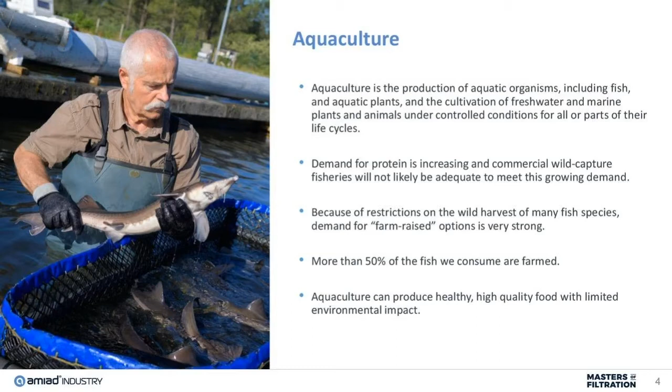I think that we're entering the perfect storm. One, the population of the world is increasing - we're just shy of 8 billion people. The environment to harvest aquaculture is a limited resource. The demand for protein is increasing, both due to population growth and changing diet standards. And the aquaculture market is already established with strong growth projected for the future.

So what are the needs for aquaculture? We at Amiad believe there is a huge unmet need for auto backwashing filtration in this market that we have begun to assist with, and we look forward to partnering more in the future.

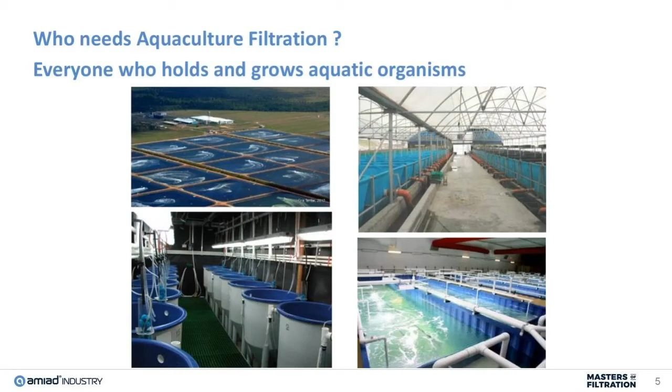For example, filtration may be beneficial in a variety of the application stages. From intake water to grow out systems, we have different technologies to meet the different needs of the plant.

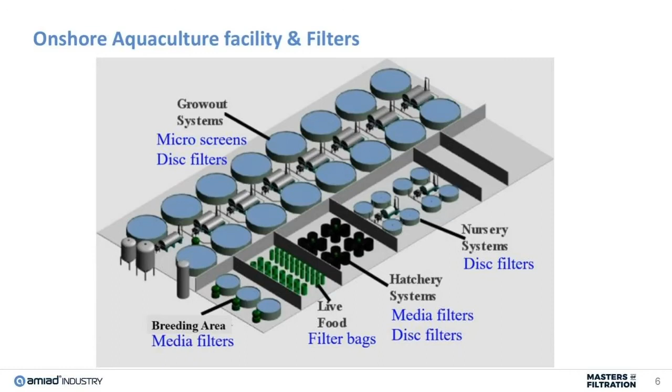Okay, so I think we're on board with why are we talking about aquaculture and why filtration, but why Amiad? Amiad has a wide range of products that are suitable for many different applications and are made of different materials. Amiad has been around since 1962 and provides solutions for our customers in irrigation, municipal, commercial, industrial, and aquaculture industries, among others.

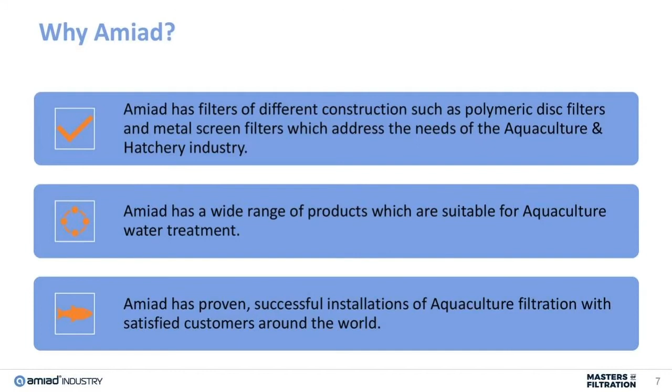Here's a brief overview of the technologies we have, and then we'll talk about them more in depth as we go on. So on the left, we have the Spin Klin disc that utilizes these discs with ridges that provide depth filtration via numerous pinch points that is created when they overlap. Additionally, this technology is known for its violent backwash, so it's great for gross, sticky, organic type material.

Moving into the second picture, the suction scanning screen technology is one of our most mature technologies where Amiad has devoted huge amounts of R&D developing the best screen for optimal performance and ideal suction nozzles for the optimal backwash. Our screens are known for their great performance and small footprint.

The middle picture shows media, we also have that, and we have different types of media depending on the application, and we have a variety of models and sizes to accommodate fine filtration needs.

And then our AMF microfiber technology can be thought of as an auto backwashing cartridge filter. You receive terrific fine filtration quality with the convenience of automation. This is most known for the Title 22 applications in California.

And then lastly, but not least, we have separators, and they're great for removing heavy particles such as sand and grit. Another benefit of separators is there's no moving parts - some might refer to them as a fancy piece of pipe. There's a bit more to it, but in general, you don't have any moving parts, which makes it handy for certain applications.

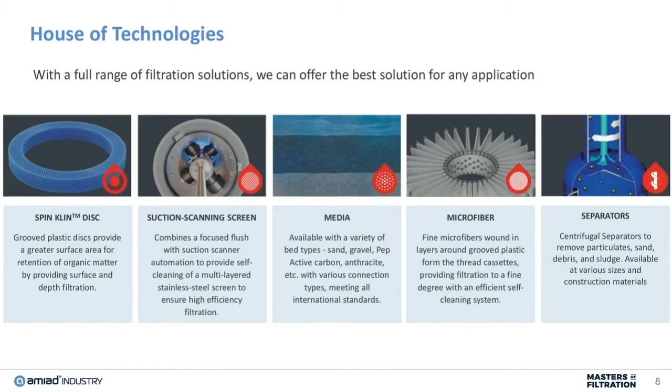So as you can see, Amiad has numerous tools in our toolbox, and we can provide the best fit for your filtration need. We're not trying to force one filter into every single application. We want to have a comprehensive idea of what the application is to see if we have the best filter for that.

And then this is a quick reference of what micron ranges we can look at for each different filter type. So on the top is our screen filters and where they operate, whether we can use the hydraulic version or the electric version. And then the Spin Klin discs, separators, media, and microfiber filters.

And for reference, the human hair is between 40 and 80 micron in diameter. So when we talk about filtration, we're often talking about particles that we can see with the naked eye. And then it gets more difficult as you get below 40 micron.

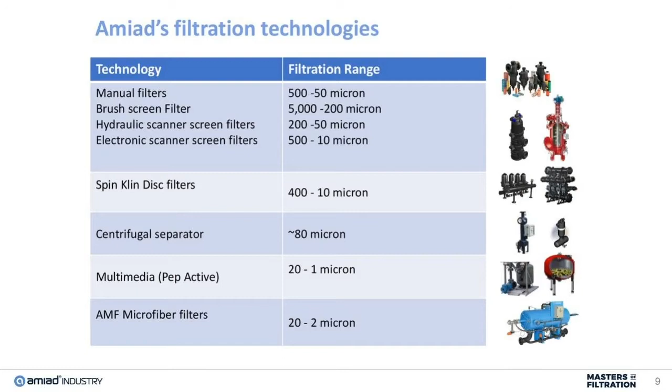Okay, jumping into screen filters. So the picture on the left is a photo of the outside of a screen. We have these cylindrical screens where particles are collected on the inside.

Then when there is a differential pressure of 7 psi between the outlet and the inlet, the unit automatically goes into backwash. During the backwash, you still have most of your forward flow, with some of it being used for the flush. After the 20 seconds of backwash, the filter comes back online with a completely clean screen.

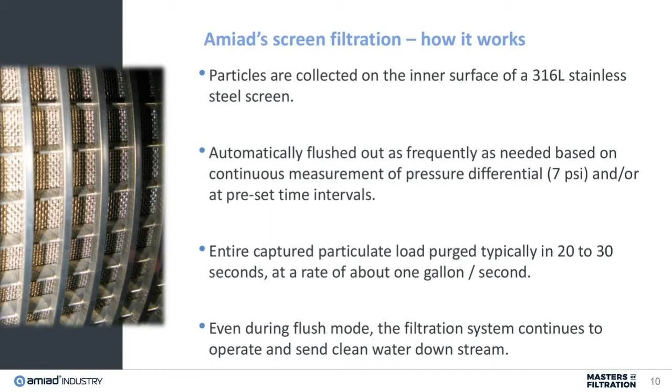One thing to note here is that not all screens are made equal. I encourage you to work with your client on what performance they are expecting out of their screen. Amiad provides weave wire screens that have an 85% plus rejection rate of the rated micron size particle. So if we say that the screen is 50 micron, it'll remove the 50 micron particles at a rejection rate of 85% at least, along with all the larger particles.

So there is not a filter governing agency or a big brother going around holding all the filter manufacturers to a standard. So someone else's 20 micron screen might only have a 40% rejection rate, and then Amiad's is 85% rejection rate. And so, this is just a reminder to be aware of what you're buying and to phrase it in ways of what performance are you expecting.

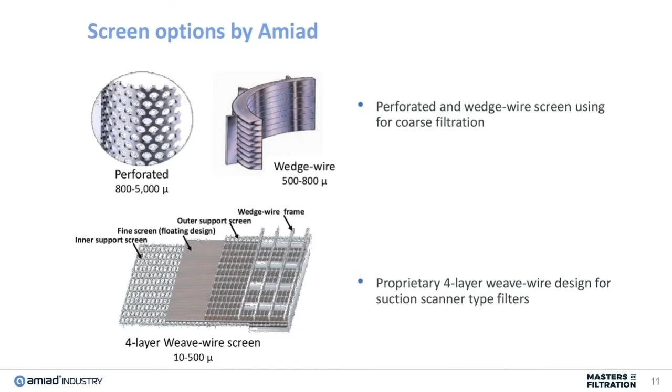Another feature that Amiad has is our spring-loaded nozzles. These nozzles do a fantastic job in cleaning fine screens because the nozzles get as close to the screen via the spring action. This allows for more efficient cleaning and less backwash water used.

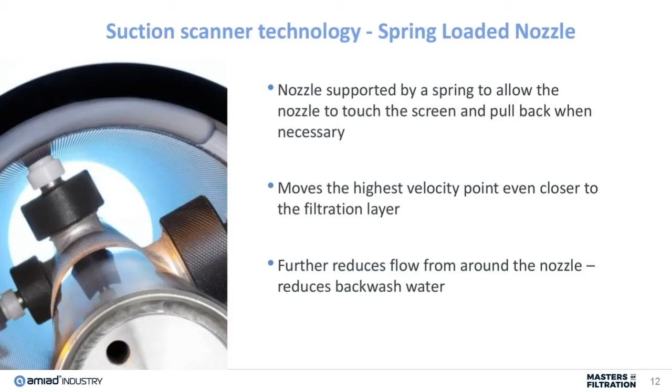So what do our models look like? We have a variety of sizes and configurations to meet the needs of your plant. We have both electric and hydraulic driven filters, carbon steel, stainless steel, rubber lined, polymeric, the works. When it comes to the models, we have a variety to meet this specific application.

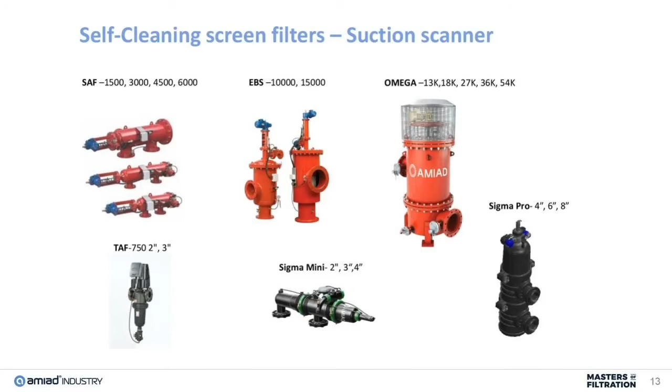Okay, let's talk examples, because sometimes I think it's easier to go through the examples together to see how they work. So here we have a manual screen. I know we've been talking about the automatic, but sometimes manual filters are just what the job requires. And here the customer just wanted to filter the big stuff before it went into the fish hatchery. So this is at 800 micron. And for reference, that's the same size as the 0.8 millimeter lead that we used to get for mechanical pencils. So, we're saying it's coarse filtration at 800 micron, but still it's quite small.

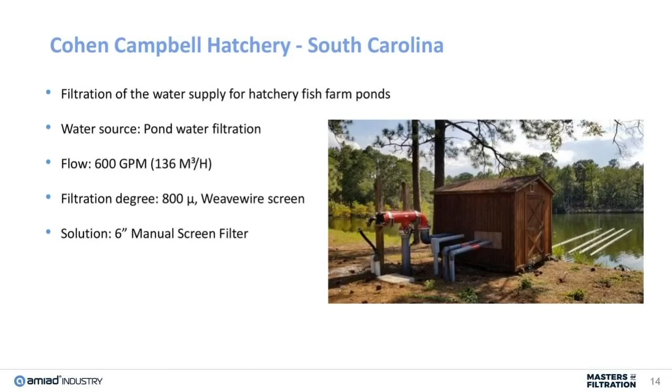Here we have our ABF brush filter, and this is with our partner Timex. The design here is similar to the screen filters, and it's just different in the fact that instead of suction nozzles, there are arms with brushes in this filter. And here we have our 1000 micron for incoming water, and the incoming water is river water, so you have a mix of both organics, your leaves, twigs, frogs, and inorganics such as sands and gravel. This is a great first step to removing the big stuff.

And on a side note, the ABF we've used in mining as well. So you can imagine it can take a really high TSS, total suspended solids, load and do exceptionally on that.

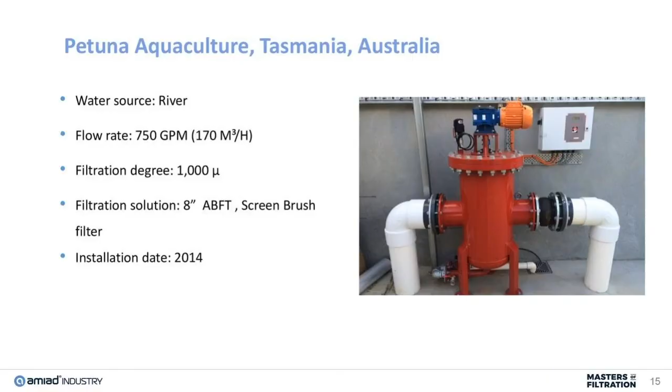Okay, so we have some good intake examples, and this is a very neat look inside the hatchery in Turkey. We have a few levels of filtration here to discuss. Stage 1, the rotary drum filter. Stage 2, a 100 micron drum filter. Stage 3, the SAF, which is the suction nozzle screen at 25 micron. And stage 4, 1 micron bag filters.

So you might ask, this seems like quite a few stages. Why would you not just go straight to the 1 micron bag if that's what is required? If we were to take the raw water right to the 1 micron bag filters, it would plug instantly, and the operation and maintenance cost would be astronomical.

So we found that stages are very helpful when the particle size distribution is wide. So you might have particles at 1 micron, at 5 micron, at 50, at 200. So when we target those specifically, we do quite well with stages. So we can be picky about which filter is where and what size it's at to address those size particles. Overall, this will decrease the overall backwash and wear and tear on the filters.

And then furthermore, it allows for smaller stages. Because if you can imagine, say we skipped the drum filters, it might require 10 SAF 25 micron filters to handle that high load rather than just the one SAF filter.

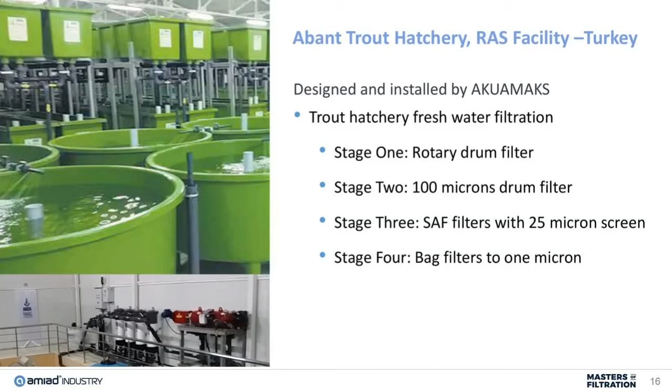Here's an example of utilizing our EBS technology at 25 micron in Vermont. We've found that anywhere between 20 micron and 40 micron technologies work very well for zebra mussel control. And we have a whole other webinar on that, so if that's up your alley and you have a problem with zebra mussels, let us know and we'll send that along as well.

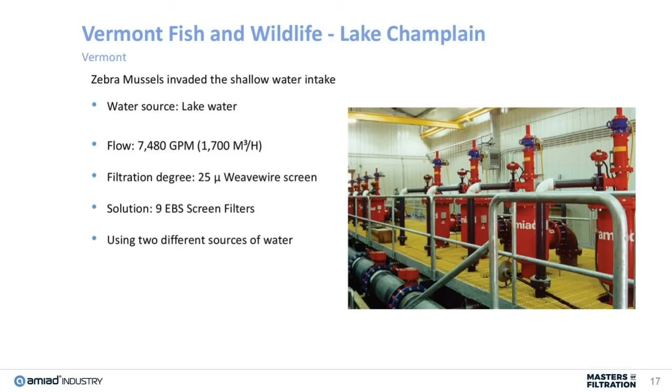Okay, so those were some neat screen applications. I'm going to jump right into our spin clean disc filters. Now, the spin clean disc filters are very neat because they are polymeric, modular, and they have a violent backwash. How these work is you have these rings, and the rings have grooves in them. When you overlap them, you make dozens of pinch points that trap the particles.

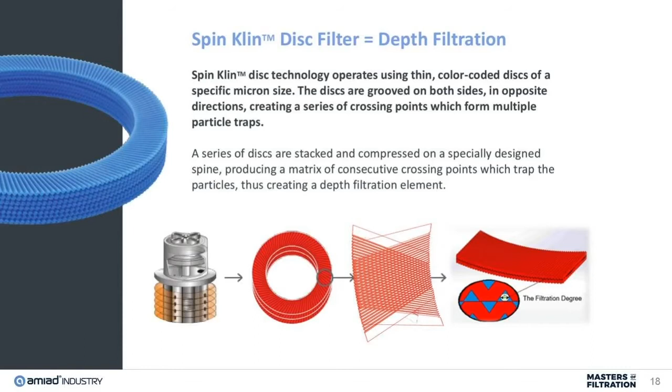A great feature of the Spin Klin, like I already mentioned, is the backwash. So in normal operation, the water comes from the outside of the rings and clean water is collected on the inside within the spine. When the particles build up a cake throughout the rings, the filter goes into an automatic backwash. And that's triggered again by the differential pressure between the inlet and outlet, and 7 psi is the magic number for that DP.

Oh, can everyone hear me? Yes, I think we can hear you well. Okay. Sorry, I think I got a note that someone lost audio. Oh, and Piero, is there a dial-in number? I see Bill asked for a phone number. Yeah, unfortunately, that option is not available. Okay. Sorry, I just saw the chat and thought I'd check in.

Okay, so continuing, when the particles build up within the discs and you hit that 7 psi for the DP, then it goes into this backwash. And the backwash means that the top of the spine releases ever so slightly, and this allows the discs to spin freely. During that time, the water is reversed through the spine, and you have tangential water pushing out and helping to clean the rings.

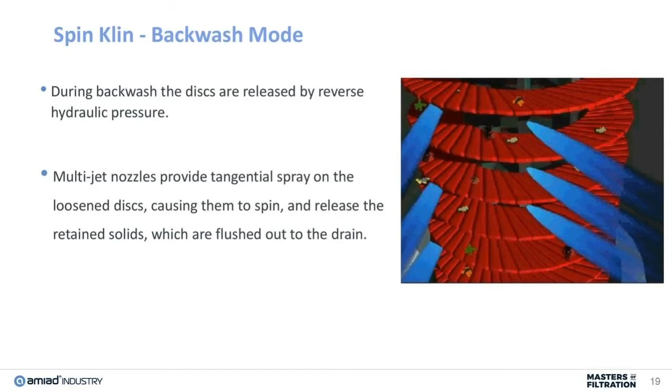So what does this look like? All of our designs are N+1, because I'm sure when I was describing the last slide, you're like, oh, that means that we don't have forward flow during that backwash. Well, we design them as N+1, meaning that say your flow rate requires 5 of the units, we'll design it for 6. So this way, when one is in backwash, you still maintain forward flow with the 5 that are available.

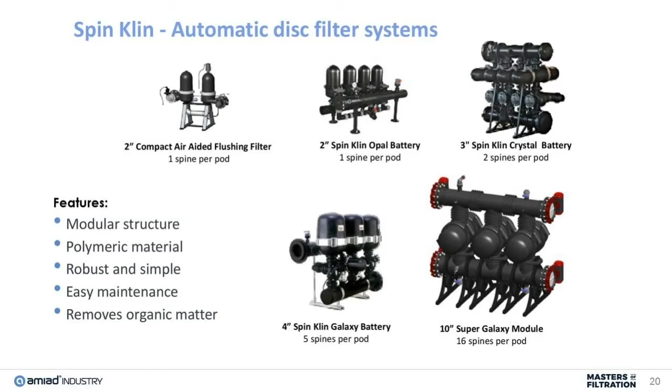And then we have different modules to accommodate various flow rates. As you can imagine, the smaller ones on the top left are for low flow. And then the ones on the bottom right, the Super Galaxies, are for very, very high flows. And this technology is great if you have organic matter because of the outside-in filtration design paired with the violent backwash. If you need more videos or pictures of what the backwash looks like or how the filter works, let us know, because we have plenty showing it in greater detail, because this is probably one of our more unique filter technologies.

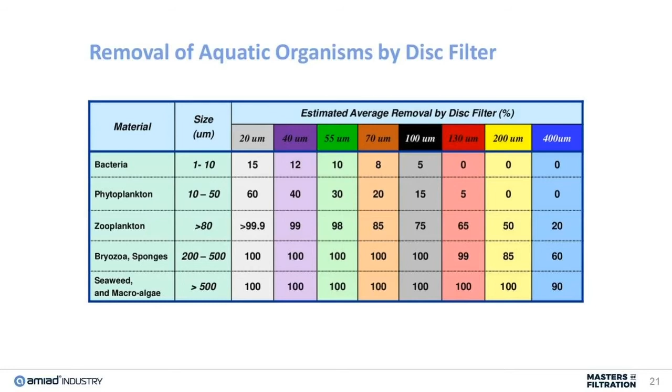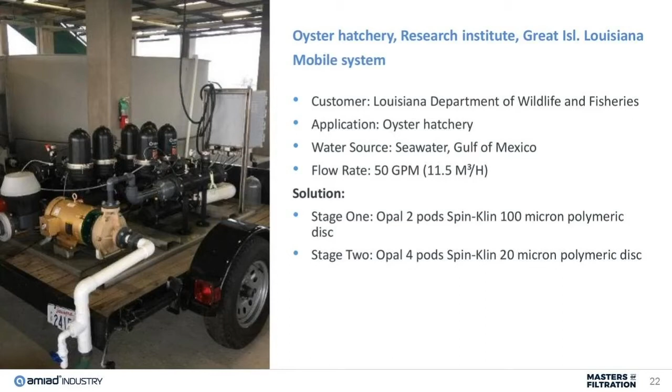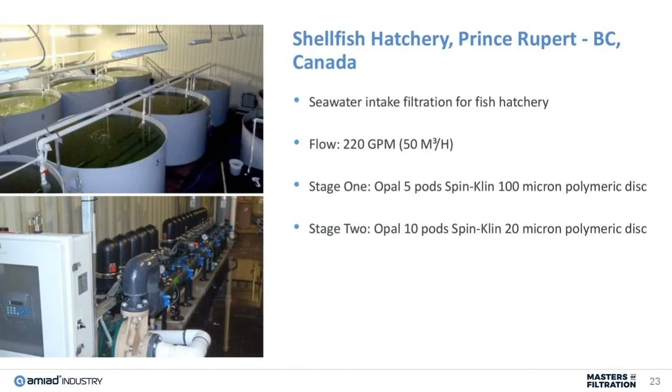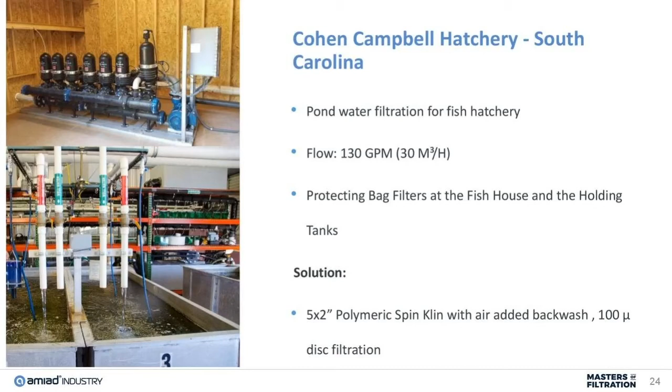We have another Spin Klin disc unit in South Carolina to protect bag filters. Because our technologies backwash on differential pressure, they will continue to provide the same great effluent quality even if there's upsets on the influent. So this is where prior to membranes or bag filters or cartridge filters, the disc filters and the screen filters that we have that are automatic and work off differential pressure are a great option because they backwash when needed. They don't require an operator to come by and press a backwash button. They are able to handle any upsets by increasing the backwash off of knowing that, okay, the particles are building up faster.

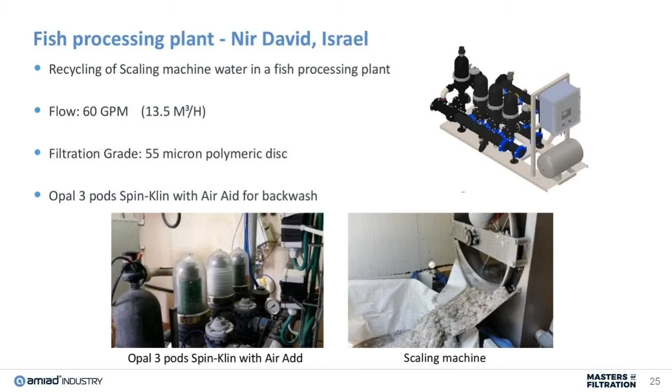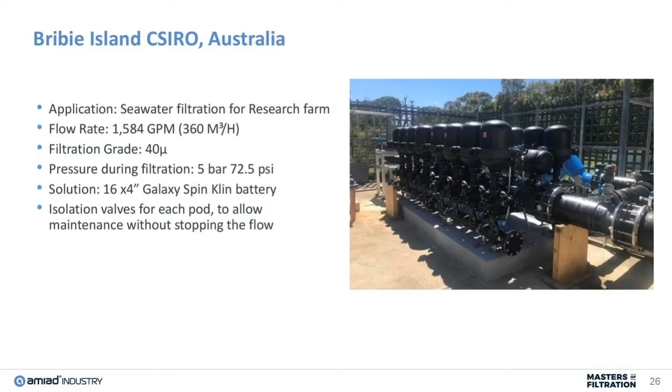We expect our filters to last 15 plus years. Often with the discs, they last 5 plus years. If they're removing organic materials, they can last longer. The spare parts are not expensive, and we don't have any spendy rebuild kits. The yearly maintenance is for the small stuff typically. And really, if you have the filter apart, it kind of makes sense just to replace O-rings and the little stuff.

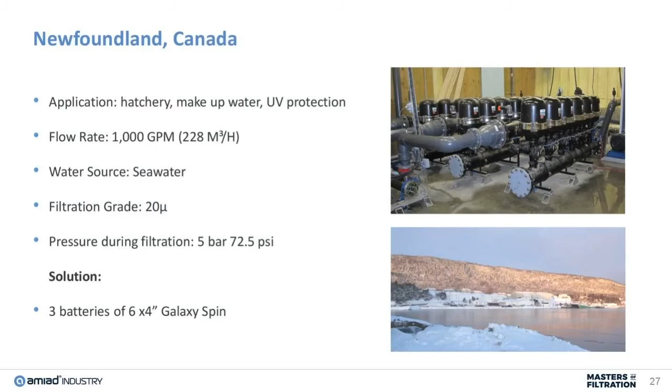Okay, so we've covered screens, we've covered discs, and now we're on to media. So many of you may be familiar with media, but just a quick refresher is typically it's sand or gravel in a tank, and the raw water enters on the top and it's applied across the media. So then the water percolates through, allowing particles to be trapped within the media, and clean water is harvested at the bottom.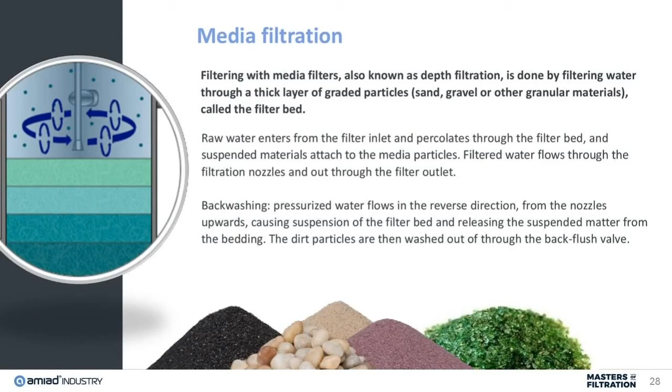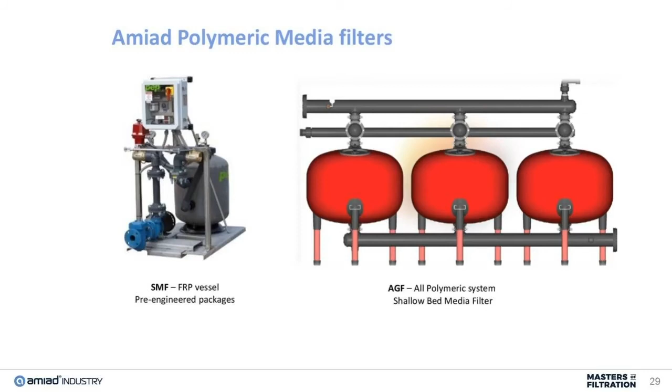Amiad has a variety of media tanks and media types. Of particular interest to our discussion is our fiberglass and our polymeric media filters. We also have our PEP active media, which is a neat media we use in industries from oil and gas to irrigation. This media is crushed glass that has a negative charge. It does a great job on organics and has a very long lifespan, 15 plus years. For reference, standard sand is typically 5 to 7 years.

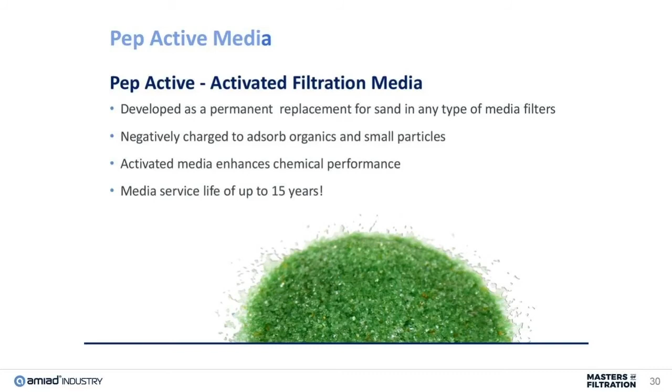We especially like this media for organics because the glass is not porous like sand. And under a microscope, we see when there's organics in sand, they slowly build up and build up because the sand just has so many places for the bacteria to live in. And even after backwash, it's hard to get that sand completely clean. But with this glass media, we're able to regenerate the glass, and it looks just like it did prior to being in use.

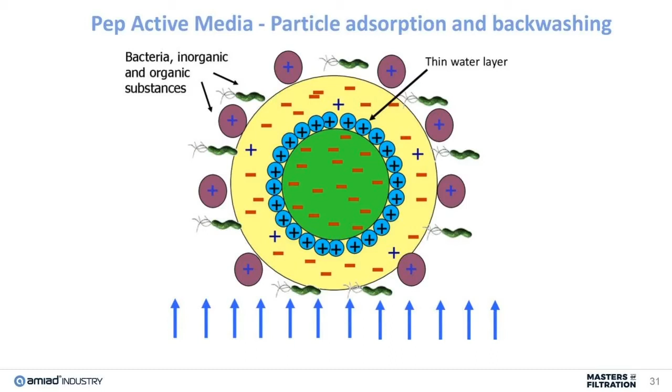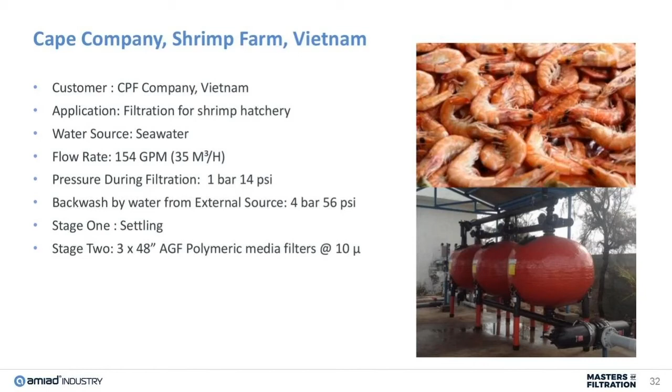So where do we use media filtration? If you need fine filtration that can handle a high TSS load, this is the option we want to look at. So we have polymeric tanks and the PEP active here, and it provides under 10 micron filtration for this hatchery. And it's also taking on seawater, utilizing our AGF, which is the polymeric unit, the red unit there. That does a bit better than, as you can imagine, our carbon steel or our stainless steel tanks. In Australia, again, seawater is filtered directly with the polymeric AGF at 20 micron.

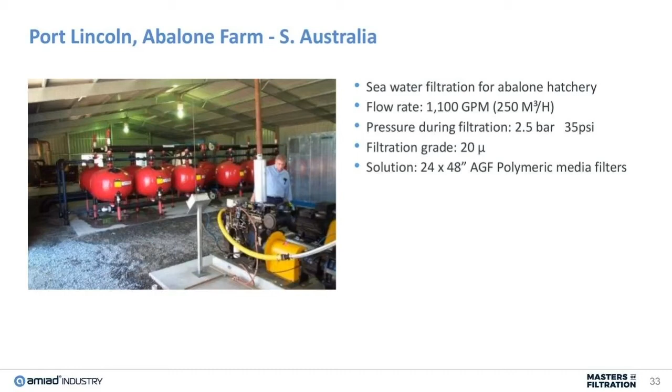And in Hawaii, we have a neat installation by Ocean's Design where our disc filters that we spoke about earlier are used prior to the media. So the disc filters are at 55 micron, and the media provides 10 micron filtration. So even though media can typically handle high TSS, total suspended solids, meaning dirty water, sometimes pre-filtration is a good idea to prevent large particles from being fed to the media.

As you can imagine, if a large particle goes in through the top and then it just sits on top of the media, it creates a channel of good clean media underneath it. And so then you go into this premature backwash, even though you still have some usable media right under that big fat particle. So this staged filtration allows the media to be as optimal as possible. And that's really important because media filtration does require quite a bit of water for backwash. So you really don't want to trigger a backwash too soon.

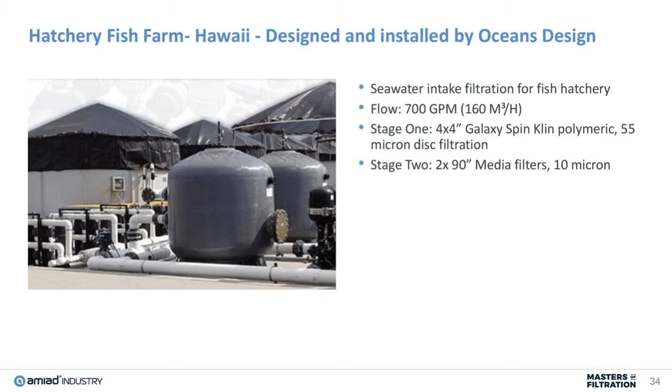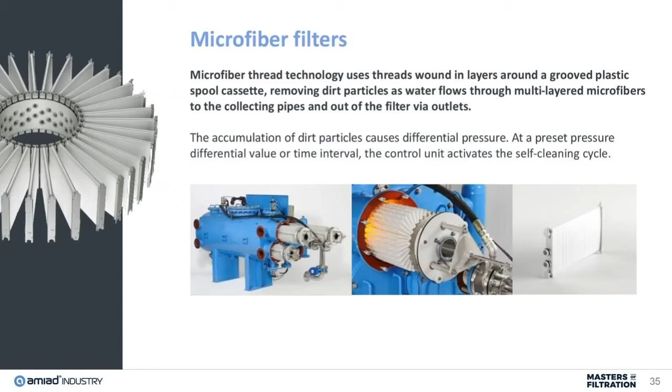Okay, for our microfiber filters, this is called our AMF, automatic microfiber filter. The easiest way to think about the filter is that it's an auto backwashing cartridge filter. Now, when you open it up, it looks a little more scary. There are quite a few cartridges in each filter, and we can go through that. We also have some videos on how it operates if you have interest in the AMF.

So we have various sizes of the AMF for different flow rates, and we offer the AMF in 2 micron to 20 micron cassettes.

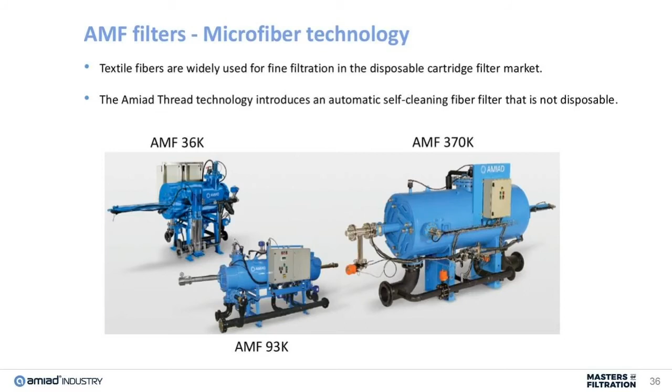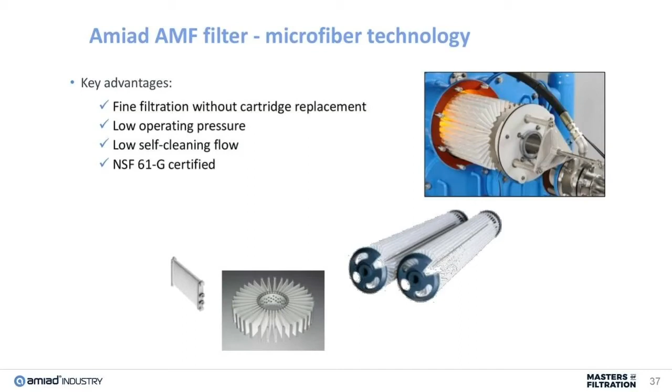It's great for fine filtration, low operating pressure, low self-cleaning flow, and it's NSF 61 certified as well as Title 22 certified. One thing I kind of forgot to mention with the screens and discs is that we do require quite a bit of pressure for the filters to use their auto backwashing feature. In general, we recommend 30 psi operating pressure, and then depending on how fine of filtration, anywhere between 30 psi for the backwash up to 75 psi for the backwash. That's all very dependent on your application, what you're trying to remove, and what size micron you want to get down to. So again, we would work through all that together on each application, case by case.

Okay, let's talk about performance. So here you can see the filtration efficiency on the left, and on the right, a picture is worth 1,000 words here. The cups left to right are inlet, outlet, and backwash. This is pretty neat, and this is a great filter for removing turbidity.

When we talk about water, we can talk about TSS, total suspended solids, which is a physical measure—if you dry a liter of water, what's actually left. TDS, total dissolved solids, talks about your dissolved minerals in the water, mostly like calcium, magnesium, and sulfates. And then turbidity is a funky one because it's more about how the light hits the particles and if they reflect, refract—it's really about how the water looks.

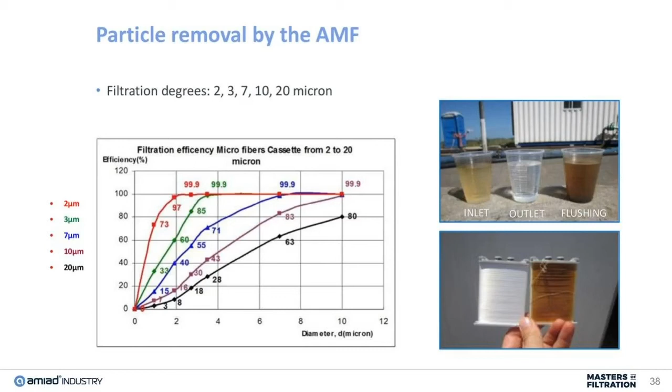So we find that for turbidity removal, most often you need to be under 2 micron for good turbidity removal. Again, it depends on a lot of things, but just in general.

Okay, so here we have an install in Washington State, and it's meant to protect the UV system using 3 stages: coarse filtration, Spin Klin disc filters, and the AMF filters at 3 micron. There are 3 AMFs here because the customer needed constant forward flow. We could do this with 2 AMFs, but when one goes into backwash, it is completely offline for 10 to 15 minutes for that backwash. So here's the 2+1 design.

There are ways we can work around this, utilizing a break tank or cartridge filters as a backup. But the AMF does such a great job cleaning. I'd say one of the biggest things to be cautious of is that it will have to be completely offline for the backwash.

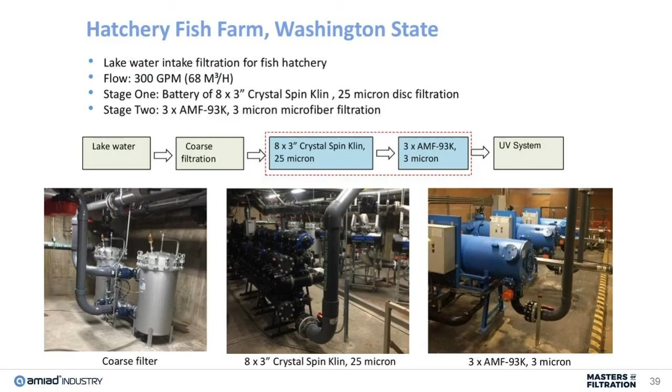Hello, everybody. I will start with this. Can you hear me? Yep, I can hear you.

Kathleen? Okay, right. I will start with Huon Aqua. Over there, we are filtering river water. The reason they selected the Amiad solution is that the previous system using old small pool filters and cartridges couldn't cope with the load. The turbidity was too high, and in order to protect the new hatchery and ozone and UV systems, they wanted something that would be more reliable and can handle a bigger variety of water qualities.

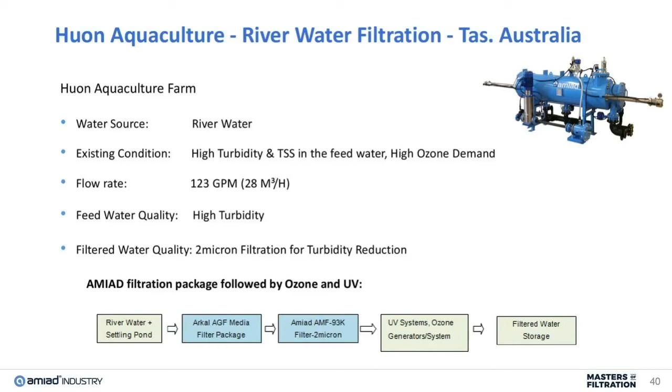So the process was having the Arkal AGF filters with the PEP active media inside, followed by the AMF 93K 2 micron. As you can see in the table on top, the feed water is changing all the time, and especially when there is a rain event, you can see high turbidity of feed water from 39 NTU up to 85 NTU. This is pretty dirty water already.

After the AGF filter, we managed to remove quite a lot of the turbidity. And if you look after the AMF in this table, you can see we can go down to 0.9 or 2 NTU. This is basically the clean water you saw before. So from quite dirty water to clean water.

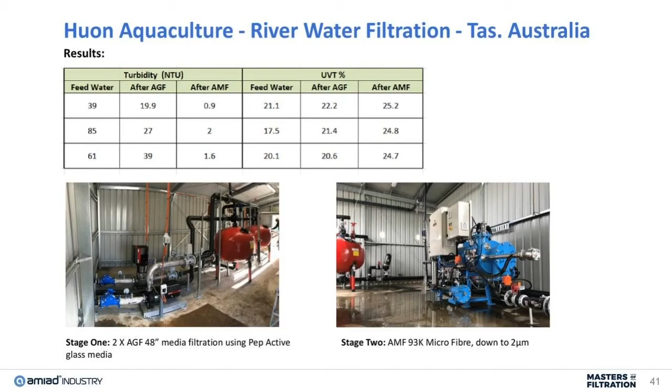The last technology that we didn't discuss yet is our centrifugal separator. Separators are the easiest technology to remove sand or heavy particles out of the water. Any particle with a bigger specific gravity than 2.6 is easily removed by the hydrocyclone. We will use them many times as the first step to remove mainly sand out of water, or any big shells or fraction of shells out of seawater.

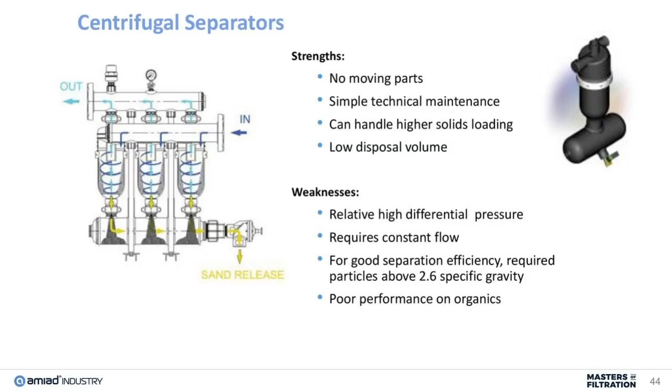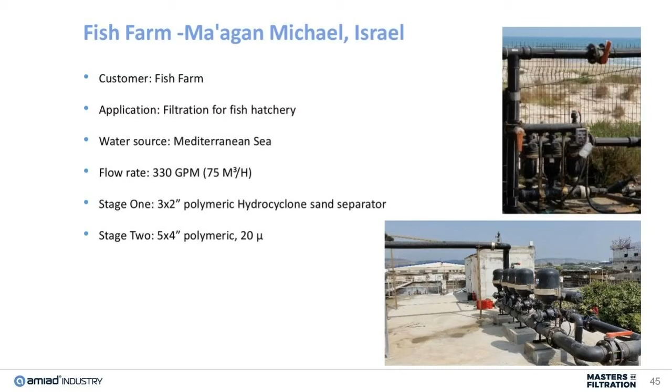In that application, we're filtering Mediterranean water. It's seawater coming from a shallow bed intake. First line is the hydrocyclone, removing the sand and any heavy particles out of the water. Then we can go directly into our 20 micron Galaxy system. You can see these filters on the bottom right photo, protecting a big hatchery for many different types of seawater fish.

As Kathleen mentioned before, we believe in multiple steps of filtration, because each filtration step will remove other particles from the water and make the filtration system much more efficient. In Hillary's, it's one of our first multi-step solutions, put in more than 15 years ago now.

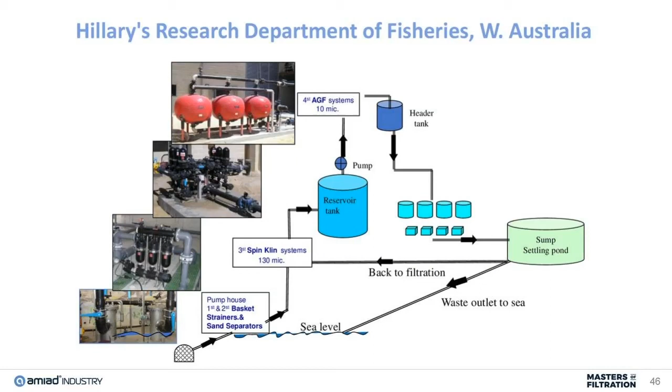As Kathleen mentioned, we are a house of technologies, meaning we have many different technologies we can offer, and we want to offer our customers the right technology for the application. We don't need to offer a specific solution or just one technology because that's what we have. We will always select the technology to suit your application on site.

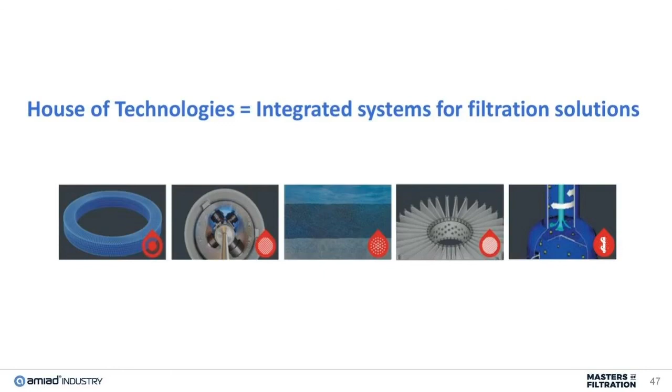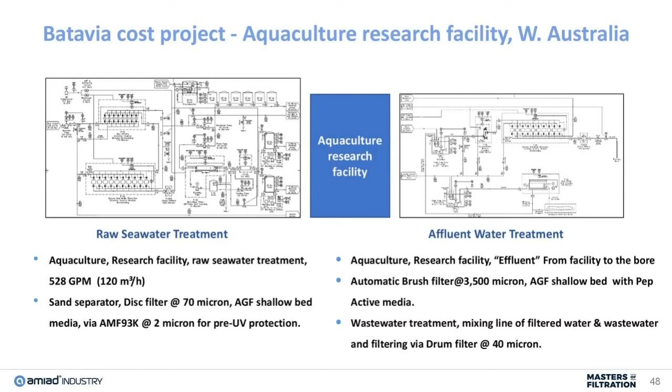That's actually a sample of a project we did in Australia, in Batavia Coast. It's a big research place growing clownfish, or the Nemo as we like to call them here. Over there we use most of our technologies, filtering the raw seawater coming into the facility, and then filtering all the effluent coming out of the facility. The flow rates, as you can see, are 528 GPMs coming in and out, and I'll go through the process in the next slide.

On the inlet side, we started with a hydrocyclone, water coming from the pumps at the intake, going through a hydrocyclone system. We control the hydrocyclone system by a PLC, opening and closing different units. Because the flow is changing, we want to always maintain a stable velocity through the hydrocyclone for efficient removal of the sand. For hydrocyclones in general, we need to lose 7 psi head loss all the time in order to have an efficient separation.

From the hydrocyclone, the water went into a 70 micron disc filter, again to remove all the larvae and organic material, to prevent them later on growing inside our media filters. The media filters in this case, the third stage, filter and improve turbidity of the water using AGF and PEP active media in them.

Following the media, some of the water goes directly to the facility, and a smaller stream of water goes to our microfiber filter, 2 micron, to provide really clean water to some of the aquariums on site.

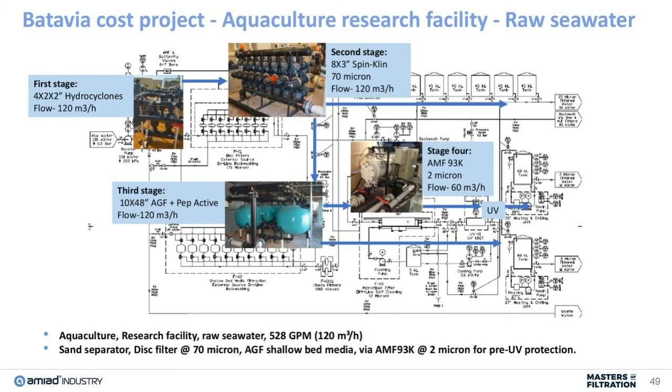After the water has been used, it comes back as effluent from the facility, and they wanted us to offer a solution to clean the water so they could re-inject it into what we call beach bores or wells, to get rid of the water. But in order to prevent blocking those injection bores, they needed to clean the water quite a lot.

So the first stage, we used our ABF screen filter to do 3,500 micron, followed by AGF to polish the water and get it clean enough for injection.